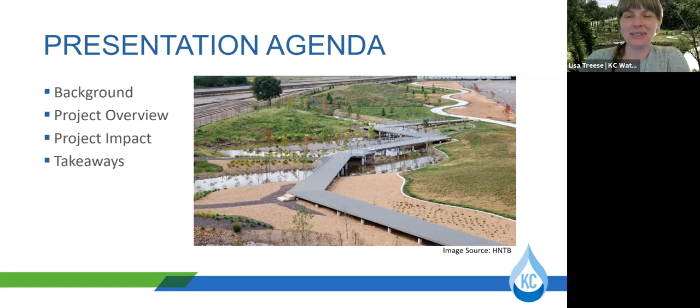Okay, so some background. This project was done as part of Kansas City's Smart Sewer Program, which is a multi-decade infrastructure investment to make sure our sewer systems continue to work reliably and effectively. The program addresses the system-wide overflow control challenges facing our sewer system in a way that protects our community and restores this vital piece of our city's infrastructure.

So this project includes nature-based solutions, also known as green infrastructure. And this project is designed to reduce the combined sewer overflows from this particular watershed, the Central Industrial District, by 20%. So it keeps that water from entering the sewer, kind of as you see here in this diagram up in the upper right. When you make a green infrastructure feature, it takes on some of the water so that you have more space in your sewer system for the things that need to go in the sewer system.

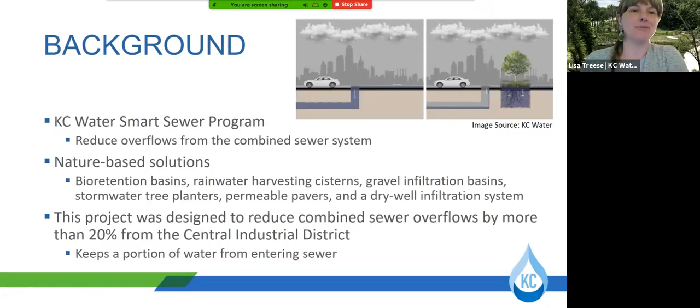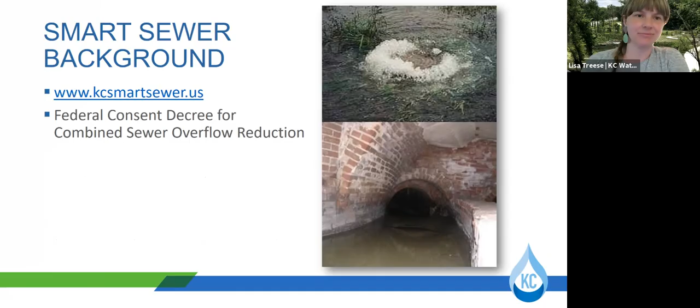So we're integrating green infrastructure in our Smart Sewer program to provide multiple community benefits. Green infrastructure can help manage stormwater the way nature intended by capturing, infiltrating, and in some cases, utilizing rainwater where it falls before it enters the combined sewer system. Green infrastructure can take many forms depending on the location and can be as large as a community park or as small as a rain garden. So now I'll show a quick video which gives an overview of the project before I hand it over to Jeff.

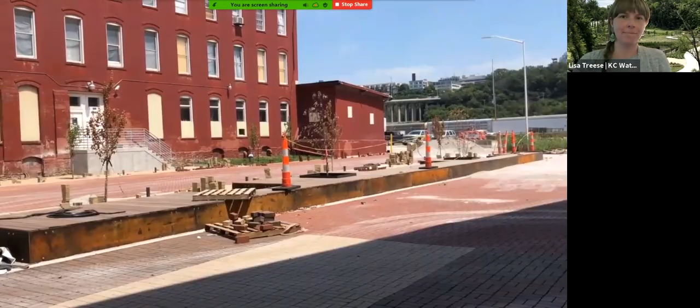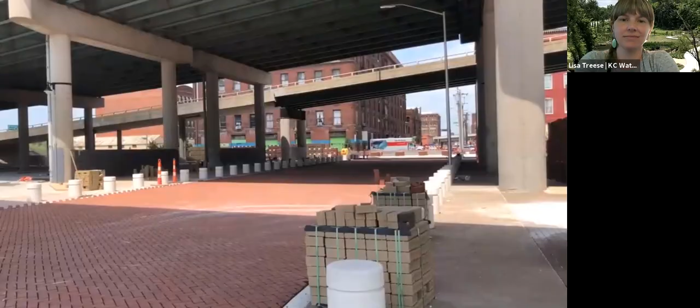A historic area in the West Bottoms is getting some much-needed improvements. KC Water is nearly complete with the Central Industrial District Improvements and Green Infrastructure Project, or the CID project. KC Water engineer Terry Goddard is the project manager. It's a part of the Smart Sewer program where we're basically trying to separate stormwater from the combined system. The CID Green Infrastructure Project includes 3 areas in the West Bottoms: the Riverview, the Stockyards, and the Warehouse districts. There are new infiltration systems, new drains, permeable paved streets, gravel infiltration trenches, improved bike and nature trails. The purpose of these natural solutions is to collect, treat, and infiltrate stormwater runoff and control overflow.

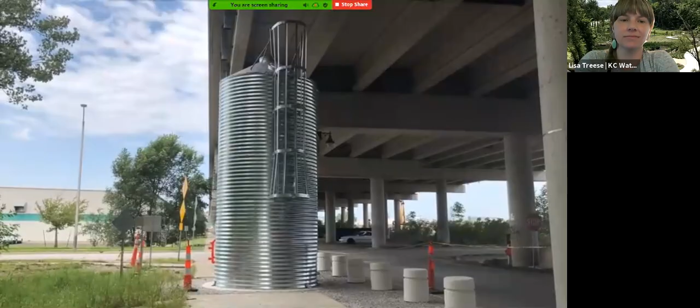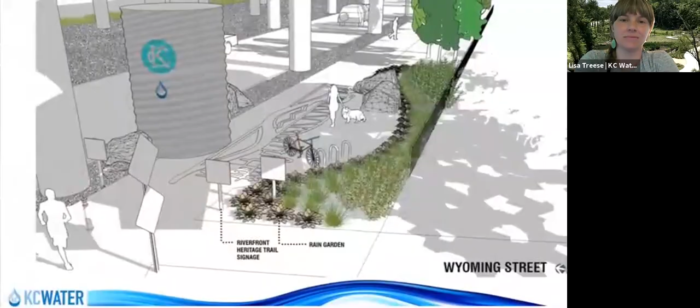In the Riverview district, from Wyoming to Mulberry Street underneath the I-70 viaduct, engineers designed an infiltration system to catch rainwater, as well as an above-ground collection system. On this side, we'll have scuppers above us that will collect drainage from the I-70 deck and empty it into these cisterns. We have 2 cisterns, one at Wyoming and then one at Mulberry Avenue. The bike trail will have bump outs to go around the cisterns, a rest stop, and bike racks. We worked closely with the Heritage Trail Association to try to inform them what was going to go on and let them give input on what they wanted to see down here. The nearly $10 million project has been in the making since 2016.

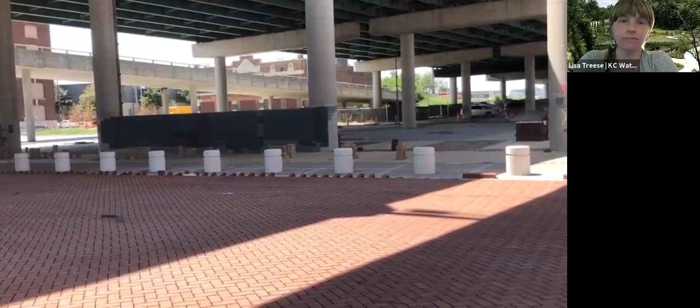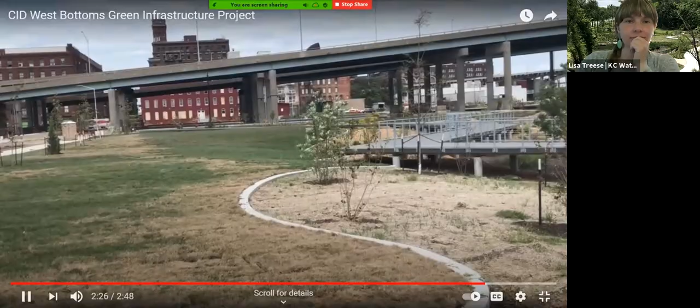At the Warehouse and Stockyard districts near I-670 and Liberty Street, KC Water restored some of the original 100-year-old stones used in the roadway and combined them with the new permeable surface. This area, ideal for festivals and street markets, allows rainwater to soak through the ground. Nearby, an interactive boardwalk will allow the public to view native plants and observe the bioswale collection system. Sit on the boardwalk and have lunch and just enjoy the view and nature. Although COVID-19 has interrupted some construction, the CID Green Infrastructure Project is expected to be substantially completed by mid-September of 2020 and final completion by the end of the year of 2020. When complete, this project will help protect the environment by reducing the amount of stormwater entering into our sewer system, which will lessen the frequency of sewer overflows. For KC Water, I'm Heather Frierson.

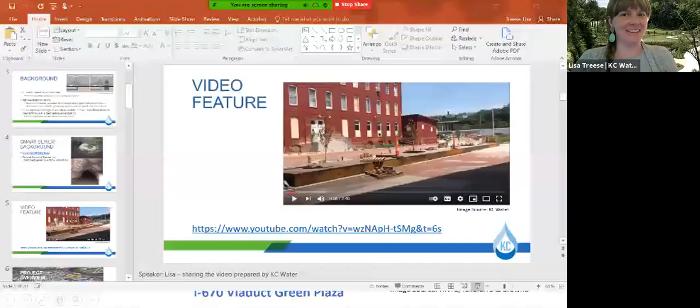All right. Yes, I think there might be a video accidentally starting automatically over there. Hang on. Okay. Sorry about that. Gotta love autoplay on YouTube. Okay, there we go. Sorry about that. There we go. All right.

Thank you. As Lisa mentioned, my name is Jeff Doudrick. I'm a project manager over at HNTB. I was the lead project engineer on this project regarding design and then through construction. So it's been a really great project to work on. Kissick Construction was the contractor.

I'm going to be showing some pictures here as we go through, and you'll see during construction we get to see the meat and potatoes of what's underground and things like that. So I want to go into the details with you and show you how we went about infiltrating this stormwater. We also presented a similar presentation to the KCIC group a couple of weeks ago, so this might look a little familiar to some of those who were at that meeting, but I'm going to try to go into a little bit more detail here.

We've got three distinct districts where we were trying to implement green infrastructure in the West Bottoms. There's the Riverview district, which is the north side of the I-70, where the I-70 viaduct infiltration trenches are. You can see that yellow box that Lisa is highlighting right now. There's another site in what's called the Warehouse district, which is where all the antique shopping and things are. That's the I-670 viaduct permeable paver plaza, the one in the middle there, underneath the I-670 viaduct.

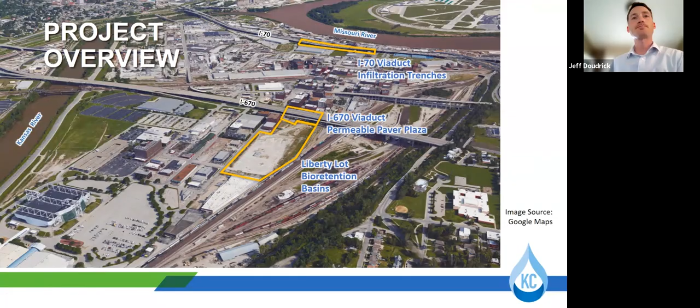So I want to talk first about the I-670 viaduct green plaza. This is the second one I mentioned, underneath I-670, just south of where the antique area is. There are quite a few components in this specific location. One of the main features is a permeable pavement parking area underneath the bridge. We got new pavers along 13th Street or 13th Terrace, down Hickory, and across 14th Street, as well as made a large permeable pavement parking area, which can be used for multiple different types of events as well as parking.

Another big component here was diverting a lot of the storm drainage from Liberty Street and the surrounding warehouses into a dry well system. I'll show you what that looks like. Basically, we take the stormwater from the surrounding area, do a little bit of cleaning of that water, and then we inject it into the sandy soils underneath.

Down in the West Bottoms here, unlike most of the areas around Kansas City, we have a lot sandier soils. So it gave a lot of opportunity to help infiltrate some of the stormwater instead of allowing it into the combined sewer system. So that was one thing that we tried out on this that we don't typically get to try in other sites.

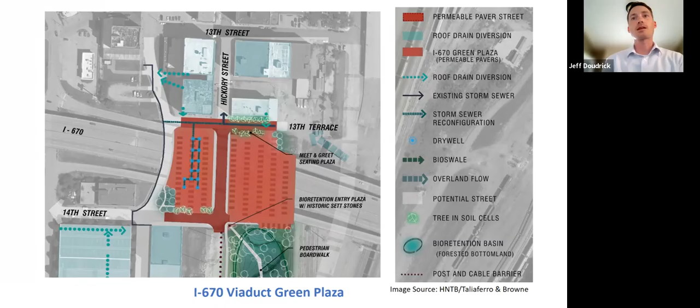This is the north side of the plaza at 13th Terrace and Hickory. One of the features that was asked to be implemented here was a meet and greet plaza. So there's a seating area along with tree planters where people can meet and walk. If you ever go out there, you'll notice there's a seating area there.

And the trees have Silva Cells, soil cells, which are structural. So it creates a structural soil. It's like an egg crate, basically, that you put the soil in, and that prevents the soil from being compacted so that the roots can grow better and you get a healthier tree. Next slide.

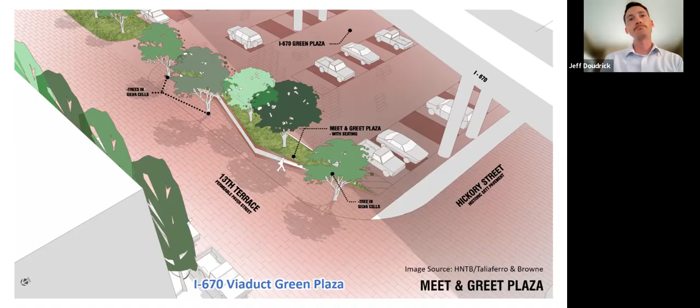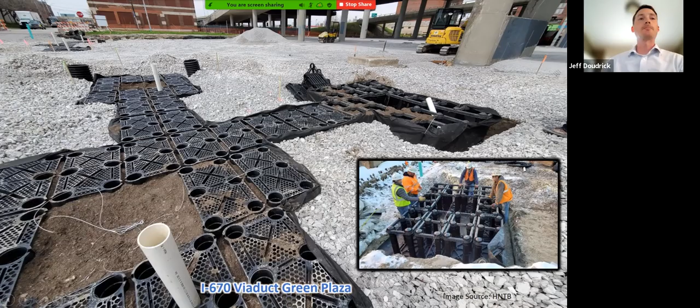And I think we get about 8 to 10 CFS or so, that's cubic feet per second, which is quite a bit for that kind of a system. So we're pretty happy with the way those are performing.

The other thing, like I mentioned, were the Silva Cells or the soil cells. Those are those egg crate type material where, like I said, it keeps it from compacting. So this is what that looks like underneath the pavers. If you go out there, you'll see the street trees in the paver areas. And so we created these kind of planter boxes underground for the trees to be able to thrive in.

And so they'll be getting water. You can see the gravel there surrounding them. That's an open graded rock, so there's not a lot of fine material in there. When it rains, that rock fills up with water, and the trees will get water from that, and then the water there will also percolate into the ground. Next slide.

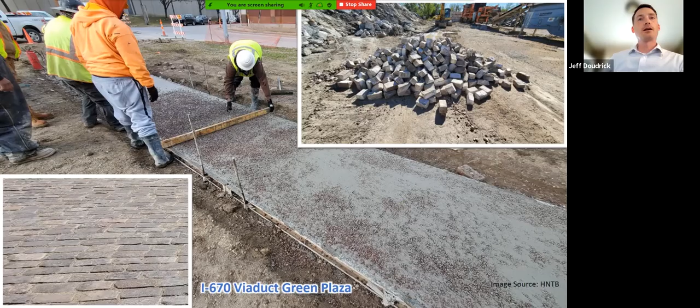This just shows you how we reused some of the sett stones on the project. The sett stones that we were able to remove intact, we ended up reusing those in some areas as actual pavers. And then the ones that got broken or crushed, we crushed them down into a seeding aggregate for the concrete sidewalks and did an exposed aggregate sidewalk.

So if you go out to the site, you'll notice you can see the rock in the concrete, and that kind of maroon colored rock is the aggregate that used to be those sett stones. So it's kind of a neat feature, provides a similar color to what you maybe would have seen 100 years ago if you had come down to the West Bottoms. Next slide.

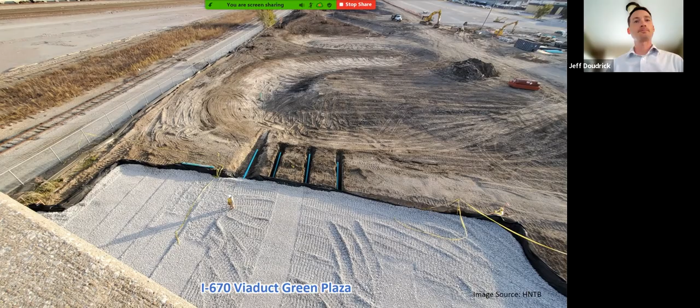And one thing I will mention is it varies. It's about 2 to 3 feet of rock underneath the pavers. So there's the paver layer, and then there's like 2 to 3 feet of open graded rock. And then you get the silty sandy material, which is native to the West Bottoms. So it's thicker than you maybe think when you go out there.

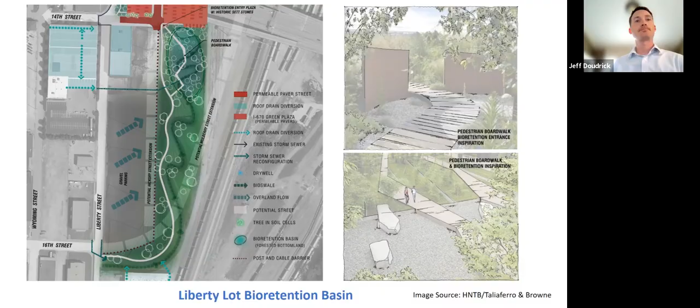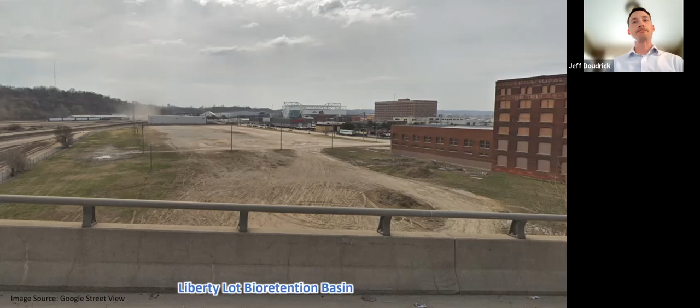So there's just a before picture of what the Liberty Lot looked like. Not a whole lot going on there, just a big gravel and dirt site. Next slide. And then I'm going to show you a few pictures progressing during construction. This was after mass grading. You can see the channel and the larger low area, as well as that connection that I mentioned before between the subgrade of the permeable pavement and the bioretention area. Next slide.

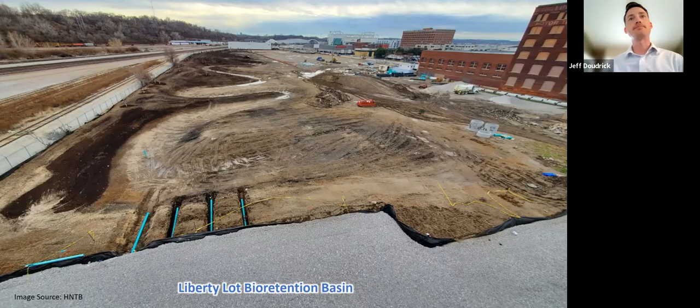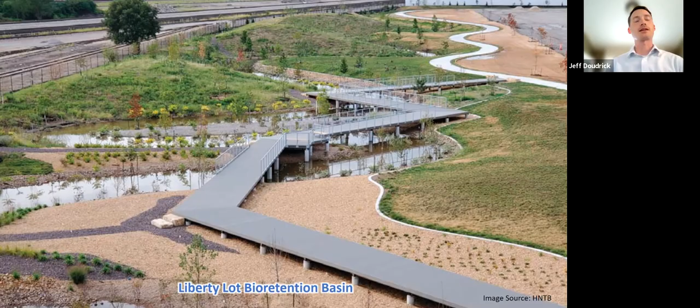And this is the final version of the Liberty Lot. This is just after construction was complete, and then we had a rainfall event. So you can see the water sitting in the channel in the low area there. And you can also see the boardwalk there. I think this is a really cool boardwalk. It gets people out into green infrastructure a little bit, so I was very excited to be able to put that in. We've got some seating along there, and we've purposefully removed some of the railing to allow people to just step off the boardwalk and go explore in the green infrastructure where they want. Next slide.

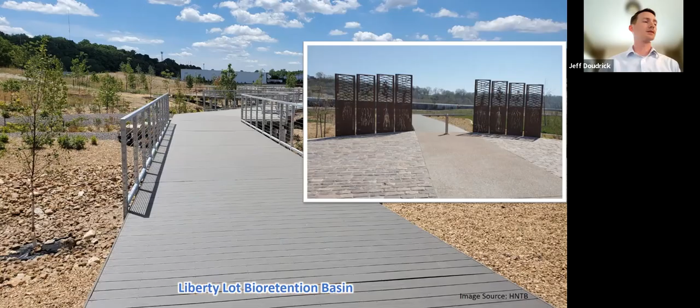One thing that we also incorporated was some educational signage, sort of a mix between art and educational signage. On the right-hand side of the screen, we selected specific native plants that had been planted out at the site, and then created some panels at the entrance to the boardwalk to help provide a barrier there. Those are Cor-Ten steel panels, I believe. I can't remember the 4 plants we put in there, but I think they're relatively common native plants.

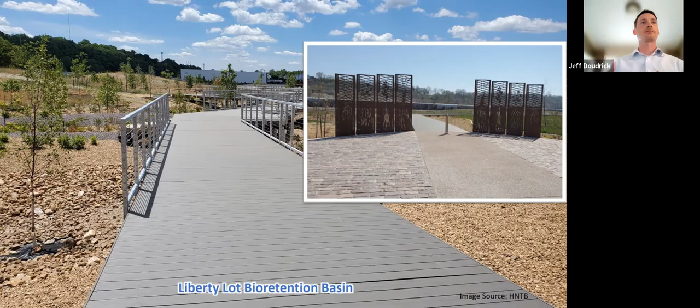But what we wanted to show there was to educate people on how native plants have such a deep root system. A lot of the biomass for the native plants is below ground. So that was what we wanted to emphasize when we put the panels up. Next slide.

The last site I'll talk about here is the I-70 site, the very north end of the West Bottoms. Before the project, all of the water was draining off of the bridge deck, hitting the ground, and then it would go into the combined sewer that was running along Intercity Viaduct Road, which runs beneath the eastbound bridge of I-70.

And I had been down there during 3 to 5 inch rainfall events, and there would be 2 feet of water standing down there. So we wanted to try to capture as much of that impervious area as we possibly could and infiltrate that into the ground.

And the biggest way that we did that was we went through, and wherever there were bridge scuppers, underneath the bridge scuppers, we dug a trench about a 3-foot deep by 15-foot wide trench, and then installed, similar to what we did underneath the pavers, an open graded rock that would collect the water, hold it, and percolate it into the ground. Again, sandy soils. I mean, we were getting great infiltration here.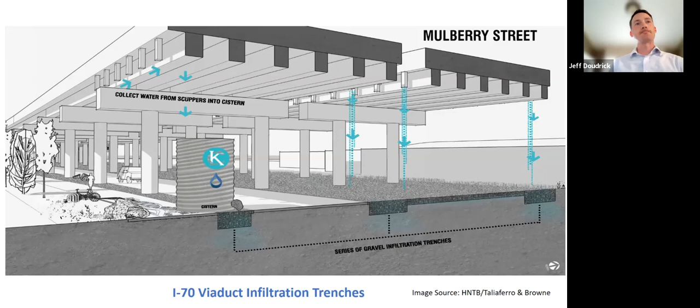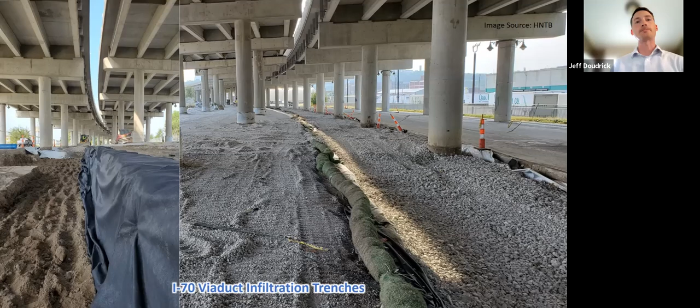Next slide. And this is a picture of construction of the trenches. You can see on the left side there, the open trenches. We had to be really careful in these cases, both at 670 and I-70. Obviously, we have the bridge above, but it's also below. So there are footings below that we had to work around and be cognizant of, and make sure we didn't damage or cause any issues. So like I said, we dug those about 3 foot deep to get to the underlying sandy soils, and then backfilled with a large open graded aggregate to provide additional storage for water. Next slide.

And you can see the scuppers above. That's the finished product, what it looked like when we were done. So it's not super pretty. I think it's pretty, but it's not like a bioretention or anything, but it does provide a really great benefit in terms of volume control and reduction. And if you look at the center top part of the screen, you can see those bridge scuppers and how they would just drop the rainwater onto the gravel. Next slide.

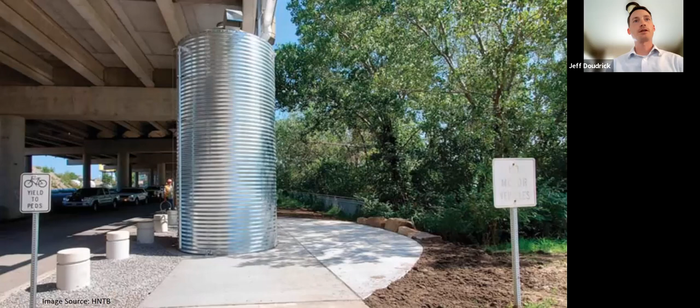And there is the finished cistern in the bike plaza. The plantings weren't quite complete during that picture, but that's an example of the cistern, and then the bike paths. We've added some striping and things to help bikers, because we know it was a little bit of an impediment to the bike path. So we did work with the Riverfront Heritage Trail to help make the sight distances and things a little better for getting around those cisterns with the bikers. Next slide.

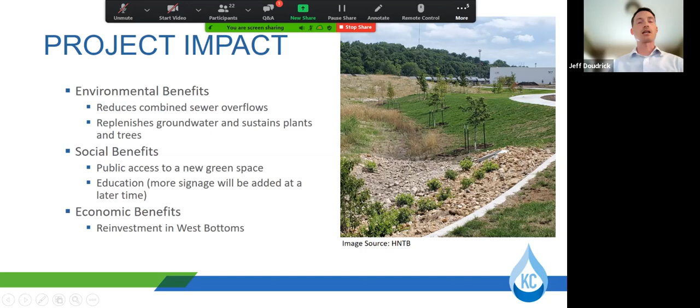All right, so let's talk about project impacts. I've talked about it a little bit, but the main benefit of any type of green infrastructure project, at least here in Kansas City, is to reduce those combined sewer overflows, divert that water, replenish the groundwater, and provide amenity in terms of plantings and things like that. One of the things, at least for the West Bottoms, is there's not a lot of green space in the West Bottoms. There's not a lot of parking in the West Bottoms, given that it was constructed so long ago, prior to cars. And obviously, reinvestment in terms of economic benefits is a big thing. So, next slide.

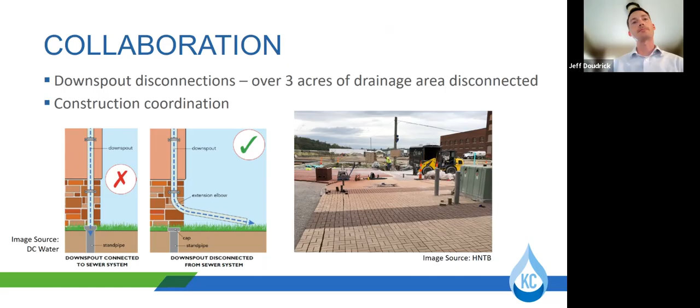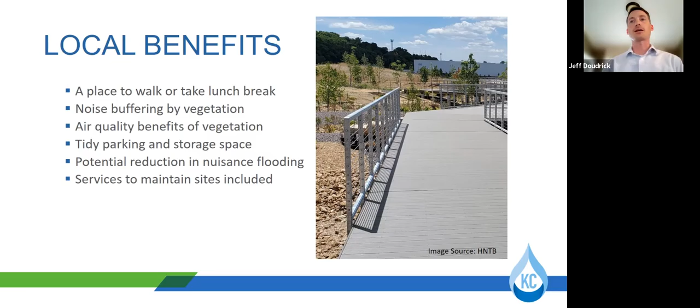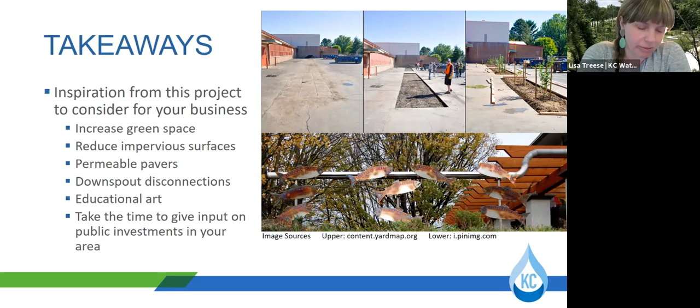Permeable pavers. So you saw our example of the big permeable paver parking lot. The nice thing with the pavers that I especially like, they come in so many different designs and they do look like an upgrade over other pavements that are out there. So not only do you get the stormwater benefit, but you also get a pretty substantial boost in the look of your parking area or other paved areas.

Downspout disconnections. This can be kind of a low-hanging fruit, depending on how big your roof is. If you even just have a few spots where maybe they don't take as much runoff and you can disconnect that downspout, any water that's not going directly into that combined sewer can help provide a little bit more space in that sewer for the things that need to go in there.

Educational art. There's so many ways to educate while also making an art piece. And this example here I thought was neat, where they took a downspout disconnection and added some fish on there, because that's ultimately where the water goes, right, to the river and where the fish are.

And this is a hard one, but anytime that you can make time to give input when there's public investments being made in your area. We do a lot of public meetings. You probably see announcements and things like that. I know everyone's busy. It takes time out of our lives to go to these meetings, but we really do benefit and value the input that we hear from the community. No one knows these sites or these areas as well as the people who are right around there. And so we can find out so much more and be able to do a better project if we have input.